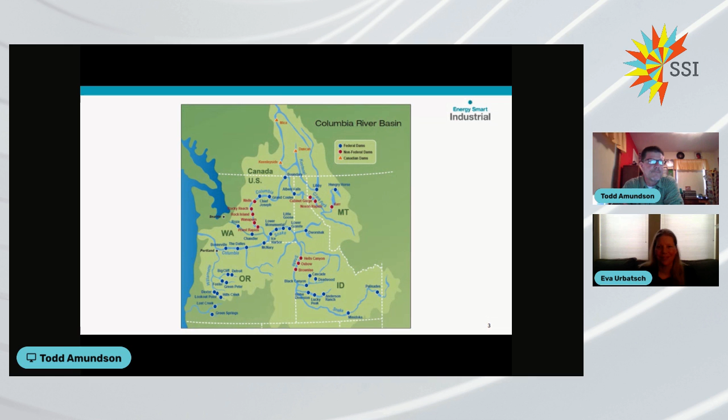Energy Smart Industrial program launched in 2009 with Cascade Energy as the implementer to address a need to meet BPA's portion of the Pacific Northwest Power Plan's targeted industrial sector energy efficiency savings. Of the over 120 BPA utility customers, 115 are enrolled in the ESI program, which represents 99% of that industrial load. Those not enrolled have very little to no industrial customers with limited EE budget dedicated to residential customers.

During its past performance, combined with expected industrial energy efficiency achievements this rate period, the ESI program has helped BPA acquire energy savings of over 10% of that overall present industrial load mentioned earlier.

ESI program design and implementation has remained fairly steady and consistent since 2009. Certainly some continuous improvement efforts throughout, some from utility feedback, others from evaluation studies, but we'll dive into those details here. A long-term program such as ESI means that highly credible boots on the ground, the program partners, engineers shown here, can come back to the utility's industrial customer site several times over the years, collaborating with new and/or senior staff, involving new energy efficiency projects and revisiting old ones too.

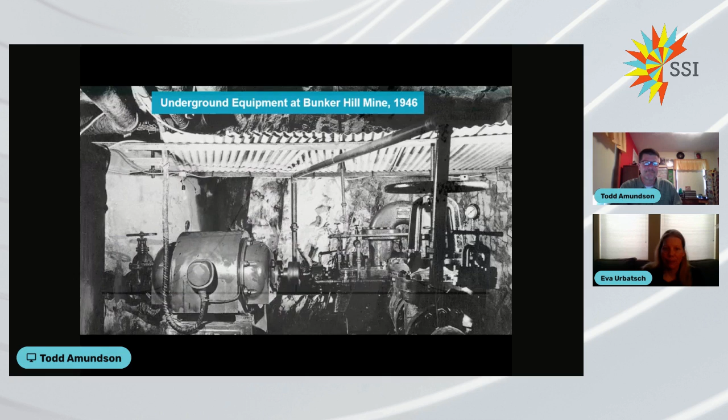I know for programmatic reasons, a lot of times we treat these as completely separate domains, but really a lot of the lessons apply to both kinds of projects. Next slide, please.

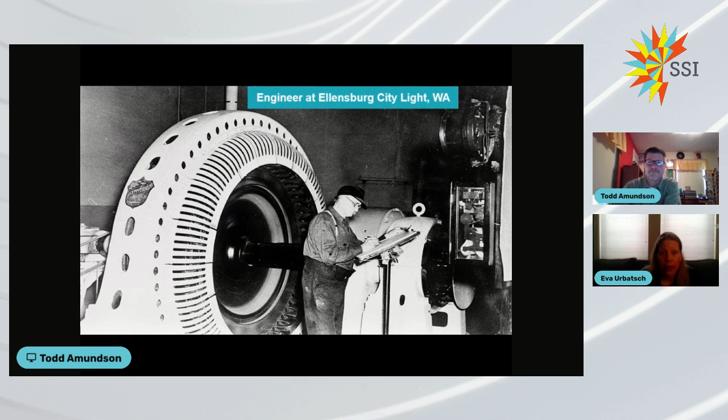So to make this system work better, where would you start? I know the engineers in the audience are probably looking at those machines and the belts and thinking about how they could reorganize them. But really, one of the easiest ways to make projects last longer is to focus on that gentleman in the middle, the people. It's not that design and technology aren't important factors. Obviously, they've gotten us a long way. But once you've done that, you really have to think about the people who interact with the projects.

Next slide. So the people are really crucial to how projects are going to work. You need buy-in, both from management and operators. But the other problem with people is there's turnover. They get promoted, they quit, they move on.

And they've also got lots of things on their mind. We work in energy efficiency day in and day out, but operators have their primary job, and then maybe they're thinking about their lunch or their kids, and maybe energy efficiency isn't top of mind.

So what does motivate them? Sometimes it's as simple as just reminding people of the system that they have, how to use it, where the set points are. Sometimes it's about reminding them of the good work that energy efficiency can do. And sometimes it's money. All of these things we can use in simple reminders to keep projects performing well.

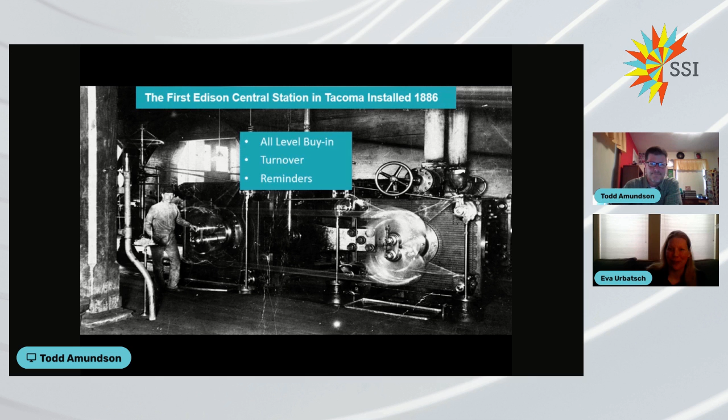Once again, it doesn't take a lot of money. It just takes a little bit of thinking outside of our usual box. So we're going to share a few stories illustrating these points. If you want more, there's more in the paper. I encourage you to go read it. All right, Todd's going to start with this story. Thanks, Todd. Thank you, Eva.

Here's a custom project of a compressed air system control strategy type that fell into the challenge bucket while ricocheting off the rim of the failure bucket. The site's a pulp and paper mill with 20 air compressors that total 3,000 horsepower and are spread throughout the multiple process areas, supplying air through a network of piping and distribution system components.

Over the years, capital equipment upgrades had been implemented, but early in the ESI program existence, with energy efficiency study in hand, an assigned site project engineer had interest and management approval to implement an overall control system. The control system would replace the efforts of an employee who would walk the plant site twice daily, manually turning each inlet modulated compressor on or off to meet demand load needs. This would be upgraded by making all the compressors run load-unload with a control system that would stage the compressors to meet demand load needs.

The program engineers worked with the utility and site to complete the energy efficiency custom project. Fast forward 7 years, or in between, the program engineers had worked a number of times with the utility and site to help complete many process improvement projects, including more than one mega project.

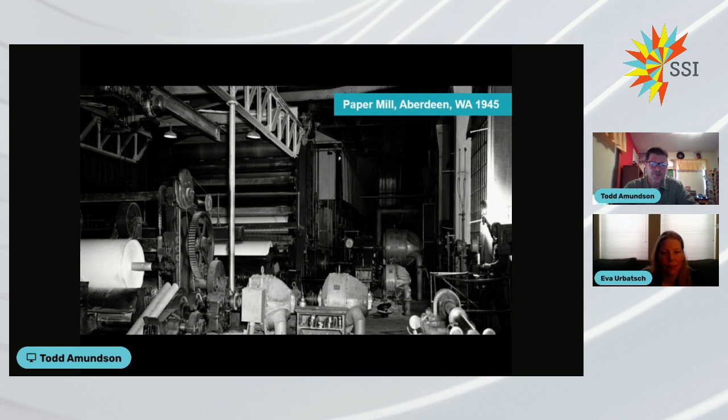But a refocus on the complete compressed air system found that many of the compressors had migrated back to manual control. A number of challenges were identified. Upon inquiry, it was determined reverting to manual controls happened when a compressor failed to meet demand, whether perceived or real.

Operator myopia was another issue, where operators would adjust the air compressors working in their area to get more pressure, which in turn stole air from the rest of the system without fixing the actual issue. And the operators were suspicious of the control equipment.

They felt the system was too cheap to function adequately in an industrial environment, that the project was, in their words, commercial grade. Well, along with the successful implementation of other process improvement projects, the program engineer was able to work with site personnel to regain most of the benefits from the original control system design.

In this case, the mill had good personnel resources and a robust data historian. Spending slightly more at the outset of the control system project could have helped mitigate the challenges or issues and possibly ensure that operators were more open to letting the system do the controlling.

A more robust control system strategy with a centralized human-machine interface would have been maintainable and a valuable asset to building trust.

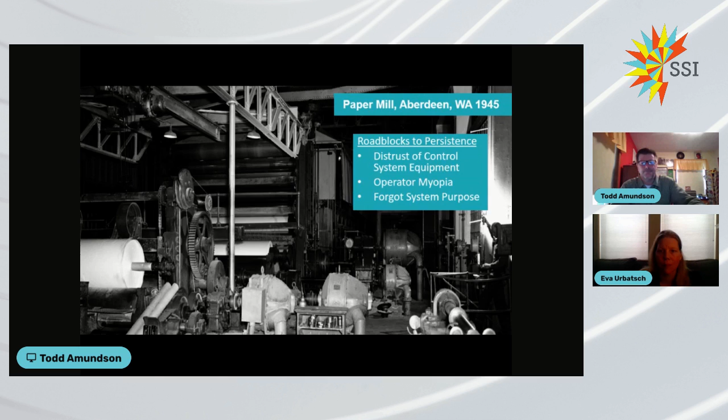And here's success story number one.

Too many capital projects rely on institutional knowledge, that is, knowledge not well documented, if at all. This can be general knowledge about the new equipment, project design intention, that is, a control strategy of air compressors to meet system needs and save energy too, or specific historical knowledge of why a project was initially implemented.

Simple reminders after the completion of the project and delivery of the energy efficiency project incentive check include very low-cost ways to enhance project performance.

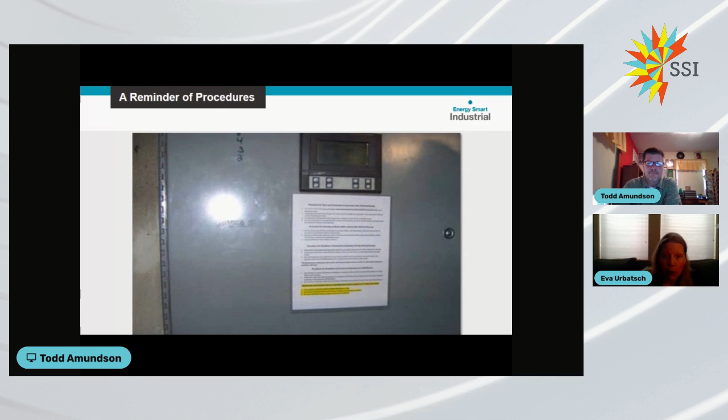So what you see there is a simple write-up that has the day-to-day procedures on it that's been printed out, laminated, and attached to the compressor.

The other thing that happens there is the issue resolution procedure. We find a lot of times that control systems in particular get out of whack because there's some sort of upset or emergency, and it's all hands on deck to get the process restarted. Things get moved into manual, but maybe they don't go back to their efficient operation that's been carefully designed.

A reminder like this can really help the boots on the ground, the people there, remember what they're doing and how to come back from any sort of problem.

This site graduated from SEM, and I'm happy to report that an engineer went back there, and the sequencing system is still in operation today.

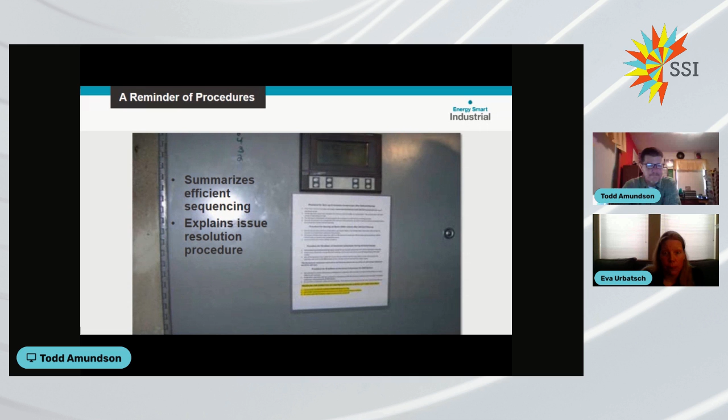All right, next slide. And sometimes the bottom line is just the bottom line. Money is really what can motivate a site. This site is a compressed air system upgrade at a lumber mill in Northwest Oregon.

The site was using their energy efficient control system, but then with layoffs and some turnover, the energy efficiency got deprioritized.

This emphasis on the bottom line really helped the site focus. It got faster response to maintenance requests and also more attention for energy efficiency projects.

So sometimes we want to go and make the fanciest thing imaginable, but a simple chart is all we really need. Okay, Todd, bring us home.

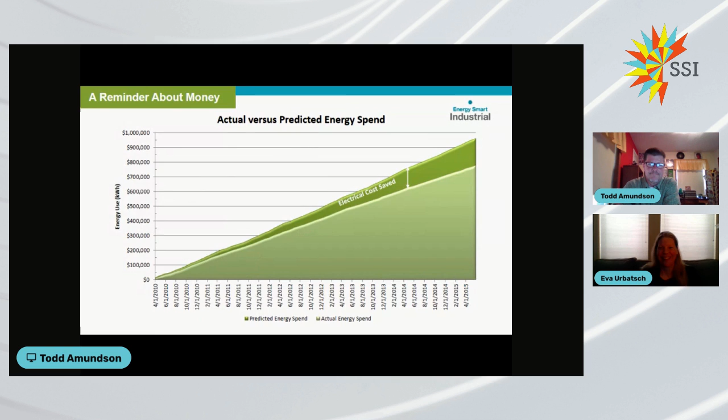In conclusion, a long-term energy efficiency program with continuous personnel, such as the ESI, can contribute to the long-term success of implemented projects. With changes of ownership and/or site personnel changes, project knowledge does not get entirely lost. This can apply to custom or capital projects, as well as those leaning more on operations and maintenance improvements or strategic energy management projects.

While surely there's more ESI program learning to be had, this presentation identified several situations that led to loss of energy savings for custom projects, while also sharing lessons learned that program implementers and sites can apply to ensure persistence of energy savings. These include program continuity, creating or updating standard operating procedures, and creating and displaying signs with clear and simple reminders for current and future operators.

When continuous monitoring by sub-metering or an energy management information system isn't practical or an option, use an existing control system to provide operators with system-level visibility. Also important: ongoing tracking of key performance indicators or cumulative sum of energy savings, and using measured and verified energy savings information, translating that to cumulative money savings reports for site staff to communicate with other employees and management. And celebrating success, such as creating and displaying project success posters.

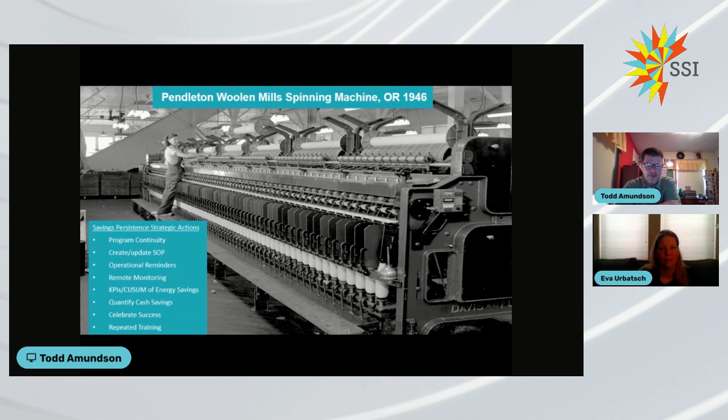In the field of energy efficiency, as in life, there are things that can and things that cannot be controlled. While optimism about energy efficiency project success is helpful, considering ways that projects can fail with early thinking about preventative strategies can reap great benefits in the pursuit of perpetual project performance persistence. Thank you.

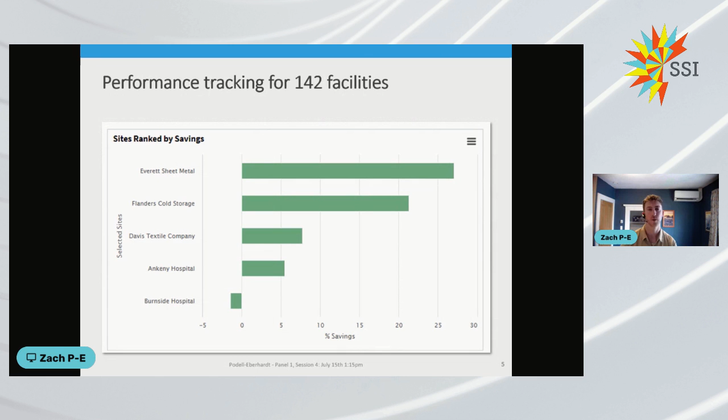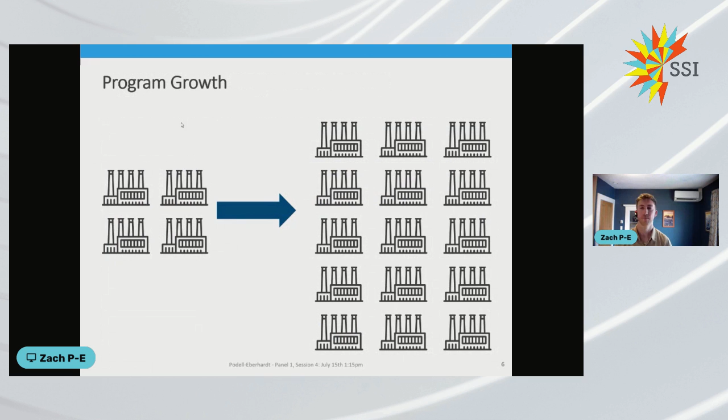So energy management programs are growing. In the DSM world, strategic energy management is growing. And as these programs evolve towards an emphasis on continuous engagements, programs will transition from managing dozens of SEM customers to hundreds. Our observations from working with SEM participants around the country suggest that the traditional labor-intensive methods of delivering SEM, like Excel workbooks and decentralized energy data collection, can't scale reliably and cost-effectively at those levels of participation.

There's simply too much data. And key mid-sized industrial clients just don't have the time or expertise to implement a better solution themselves. In some ways, Sysco facilities are actually a decent proxy for mid-sized industrial sites. They use about 4 to 10 million kilowatt hours per year, and they have a heavy industrial refrigeration load similar to the process loads you might see in a food manufacturing facility.

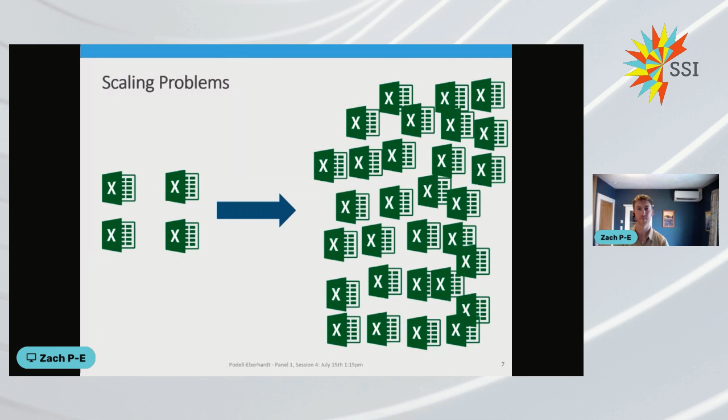So what's at risk for Sysco and others? First of all, savings are at risk. Without energy accountability, without putting credible performance tracking into the hands of their people, Sysco's program would likely have been less effective at saving energy.

Persistence is certainly at risk. For Sysco, if performance reporting shows backsliding for 2 consecutive months, that facility gets put on a watch list and gets extra support to recover. Additionally, a lack of performance tracking puts the entire program's credibility at risk. If an SEM or pay-for-performance program can't get timely data to report on performance, it erodes the overall credibility of the program, because if you don't believe in the reporting, you just start ignoring it.

We do recognize that a case study on a program across a single corporation is not necessarily a one-for-one comparison to a DSM-sponsored program. But despite the differences, a corporate-driven program and a DSM program with various participating facilities all share the simple characteristic of a group of facilities who have set out to achieve an energy savings goal, mostly on their own, with support from coaches and peers.

So how does Sysco actually save energy? They do so through a combination of retro-commissioning, training and behavioral change, mechanical and lighting retrofits, and efficient new building design and construction.

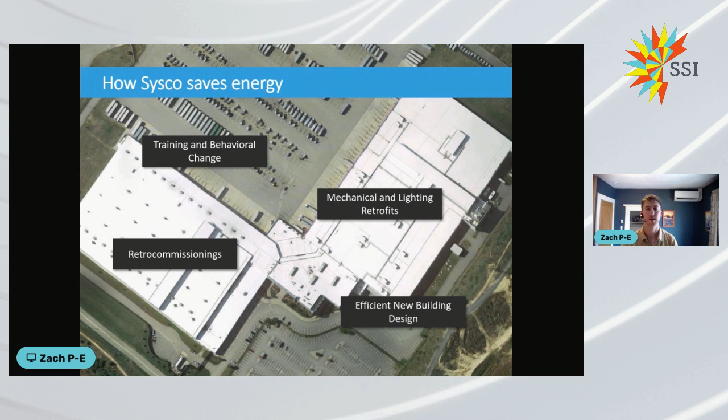But this presentation is really focusing on energy performance tracking. So how does Sysco track energy performance? They retrieve near real-time 15-minute interval electric data through data acquisition hardware installed at their facilities. I'll point out that Sysco really has not invested in sub-metering. This monitoring is being done at the utility meter level because the purpose of Sysco's metering is to generate accountability, not diagnostic capability. Sub-metering is a lot more expensive to maintain and install, and Sysco just hasn't seen the value of that sub-metering. You don't need sub-metering to create accountability for energy, is a lesson that Sysco has learned.

Sysco also pulls in weather data and inbound and outbound case movements on a daily basis, which we call production.

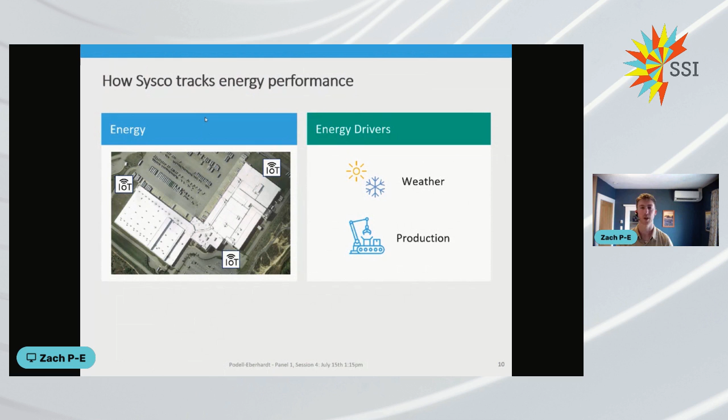And they follow a top-down measurement and verification methodology that meets IPMVP Option C and ASHRAE 14 guidelines and aligns closely with best practices found in DSM programs. And all this happens in a centralized system for the 142 facilities in the program.

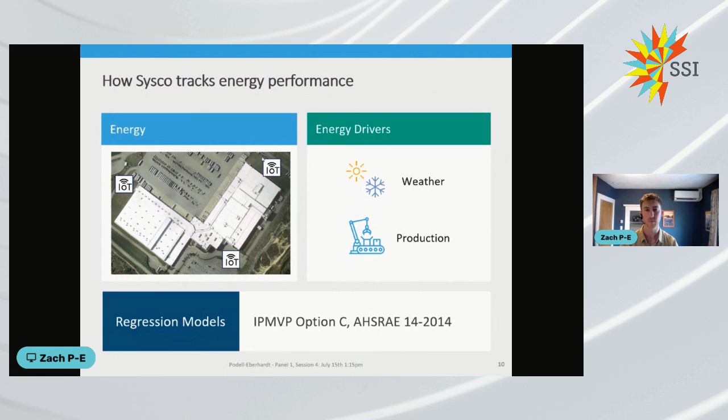So as we analyzed Sysco's success story, one theme appeared. Sysco uses energy tracking to create an accountability structure for energy performance, which we've called energy accountability. Sysco holds people at the corporate, regional, and facility levels accountable for achieving efficiency goals, all the way up to senior vice presidents and down to refrigeration system operators.

And over the years, through testing and iteration, our team has found that 5 characteristics have emerged as requirements to create lasting and effective energy accountability at Sysco. These characteristics are analyzed in more depth in our paper.

The first is consistency. Tracking and reporting can't be a flavor of the month. For example, Sysco's performance reporting has maintained the same metrics since 2015.

Clarity is the next characteristic. It's important to define success plainly and don't move the goalposts. Sysco's reporting focuses on dollars and percentages, not kilowatt hours.

Fairness is important. Fair performance tracking is an excuse eliminator. Unfair performance tracking just breeds excuses. So for example, if you compare a facility with LEDs and an efficient ammonia refrigeration system to a facility with T8s and packaged rooftop refrigeration units, the older facility is never going to look as good as the newer.

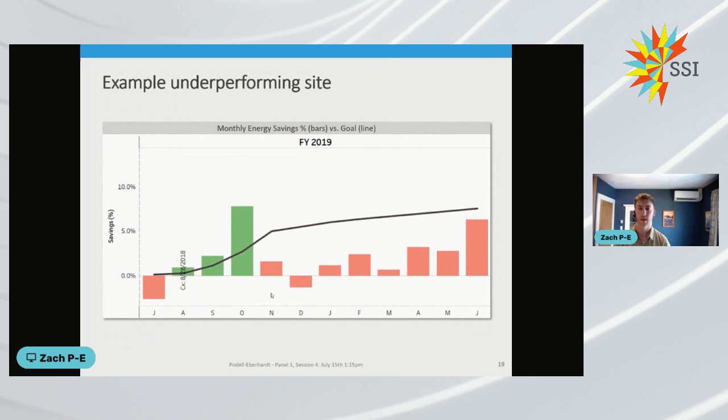Then something happened in November and the savings dropped. Very quickly, the program knew something was wrong, and by December the site was clearly backsliding and received extra support to get back on track.

More granular and recent data is always accessible and is pushed to key individuals, like this report that gets sent weekly to site facility managers. They appreciate this heat map report.

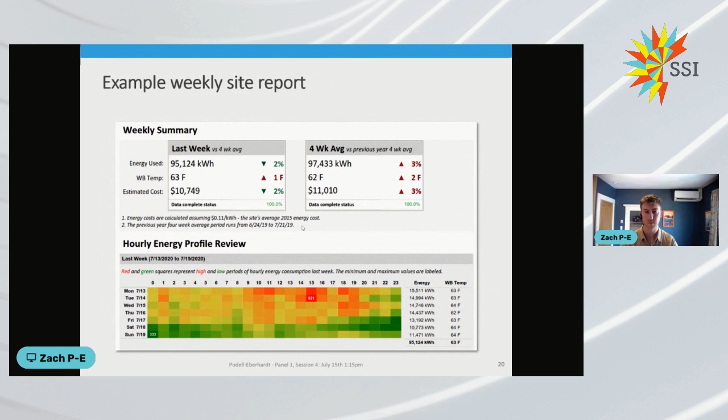I want to circle back to the applicability of this case study to DSM programs and talk about some of the limitations involved and how to overcome them.

If you're thinking this is a great case study to share with DSM participants, so they're motivated to set up performance tracking and cut their energy use in half like Sysco did, please do so. But in our experience, most DSM participants don't have the internal systems, knowledge, or commitment to self-generate the consistent, clear, fair, timely, and trusted energy performance tracking that's necessary. Sysco hired a third party to deliver this reporting for those exact reasons.

One limitation is that data acquisition and baseline modeling poses huge challenges in DSM and corporate energy programs. Managing all the inputs and outputs is difficult. Even if smart meters might be installed, the data might not be easily accessible. And complex industrial facilities can be extremely difficult to model.

There are some systematic limitations. More and more utilities might have smart meter data to provide high quality 15-minute interval energy data, but there are still structural limitations for third-party contractors to acquire this data. A 2020 ACEEE survey of 52 utilities found that most were underutilizing that AMI data in their energy efficiency programs.

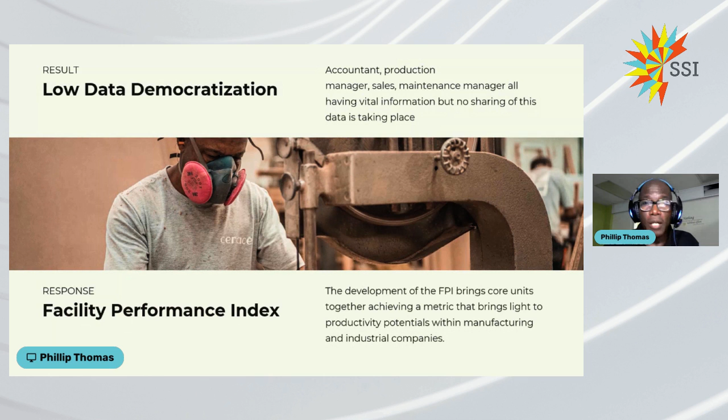And here is why the FPI was born, because the FPI is a Facility Performance Index. You're going to see it, you're going to see what it's about, you're going to see how it looks. It brings the core units together, achieving a metric that brings light to productivity potentials within the respective companies and firms. It brings a whole new aspect to what was being said before: day-to-day accountability of what is happening and what needs to be done. It also gives persons, not necessarily even in the manufacturing sphere, an opportunity to get a quick and easy understanding of the potentials, and then apply that. And furthermore, being able to do internal benchmarking with external benchmarking, and the list goes on, which you will see as we go along.

Okay, so let me quickly get something done here. So you have the data, the responsibility, the expenditure. You have the data, but it's in different silos. The responsibility, each person is doing their respective area. And the expenditure has just been a matter of money being put together for various initiatives, and at the end of the day, it's not being maximized because the disparate information isn't being brought together. And so, lost opportunities result.

Now I'm going to show you the next slide, and many of you are going to smile because this simple equation is something everybody knows from primary school days, or grade school, K-12. In Jamaica we call it primary school, but high school too. The y equals mx plus c. Not a Fourier series algorithm or anything complex. But I want to break this down because ISO 50001 says the following.

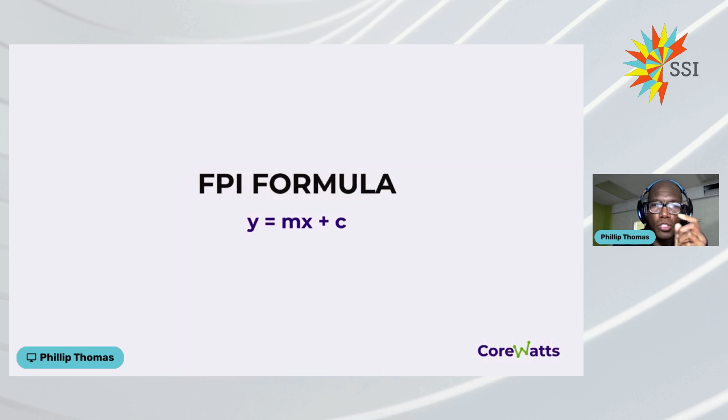In energy consumption, you need the following: y is the energy output, fair enough. The efficiency metric is our m. The variable could be production. I think it was either Todd or Eva or Zach who mentioned weather data also being included, primarily for production, because thankfully where we are, weather isn't a wide variance, but that would also be inclusive. But here's the kicker to it all: when you use an energy per cubic foot or any other metric like that, what it's basically saying is the plus C, the base load, is taken out of the equation. It's zero.

And if you start wrong, where do you usually end up? There you go. And so what ISO 50001 was so instrumental in doing is getting an accurate energy performance indicator, or EnPI, for the matter of how energy is to be monitored and reported.

Just a quick example. Say you have a large firm with a large piece of equipment, and a smaller subsidiary elsewhere. The smaller subsidiary hears from the large firm, hey, get this piece of equipment because we've had phenomenal results. When you put that equipment in the small firm, they say, you just killed us. Why? Because the base load in that large facility is offset by the larger production quantities. When it's put in the smaller facility, once they turn it on, they just don't have the production volume, call it break-even analysis, to make up for that base load. So the whole dynamics of the equipment, while beneficial at the large top tier, is catastrophe for the bottom.

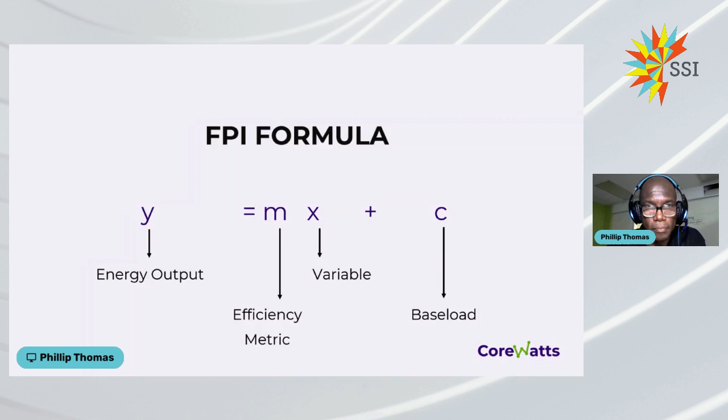So having established that metric, what we saw was the following. Can we take that and populate it daily? And being able to populate it daily, what would we find? It was magnificent, because what it demonstrated, and you'll soon see the graph, was the base load coming out and a true efficiency metric coming out.

You remember the M and the plus C? So having seen the base load by itself, because remember, base load represents the energy consumed when the plant is not producing, we began to say, hold on a minute here. Are you saying this is what's happening? Listen to the train of thought. Now you're getting the accurate dynamics of the plant. Simple, anybody can understand the plus C once they recognize what base load is. So the person began to ask, so why is that?

So we went into the production line, and guess what we found? One piece of equipment, called a post grind, was 25% of the entire consumption of the plant. Can you imagine that? They were going into LEDs and all these other things beforehand, not recognizing that one piece of equipment, which was not LED lighting, was accountable for 25%. Can you imagine that?

So the plant manager said, Phillip, before that we were investing in so many of these areas. But let me not go off on a rabbit trail.

So with the base load, they recognized that they would produce, pause, the equipment continues to run, and then another batch comes in. And the first thing we said was, hold on, let's get more of these batches and take down the interval, since it's a batch process. That meant some adjustment with the ingress of raw materials, but that was nothing. The other thing was to see whether the type of operation actually matched what the equipment was made for.

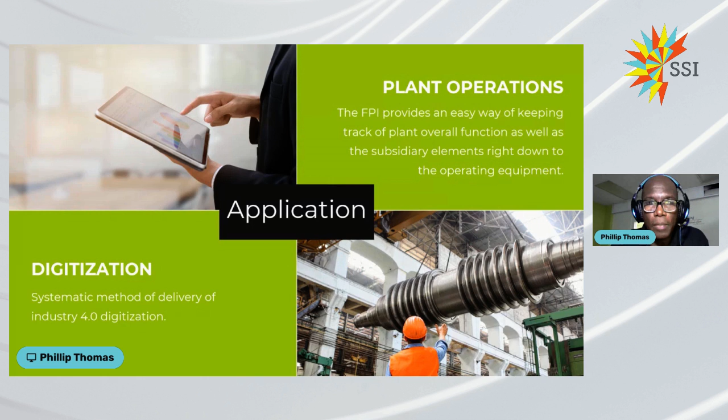So I talked about this future application. We have pump curves. I see, and my time is almost up, but with this we can also start doing a similar FPI curve per equipment for the respective manufacturers, so persons are able to understand even clearer how they're able to apply what they produce with their respective products.

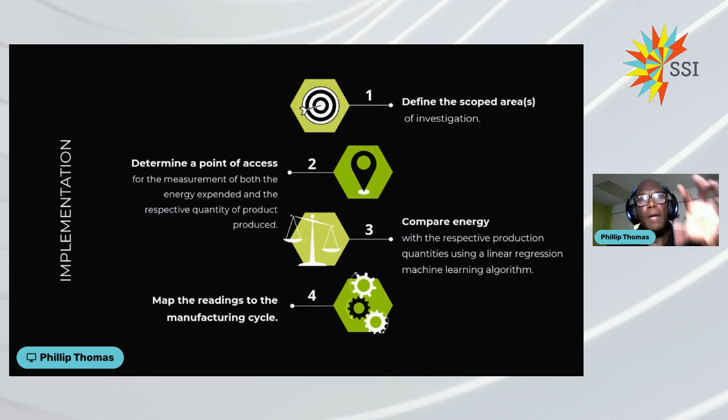So you're bringing the energy and the respective quantity. And what happens now is that, and again, as I demonstrated this with the linear regression, being able to combine the two and then map the readings to the manufacturing cycle. And how does it look?

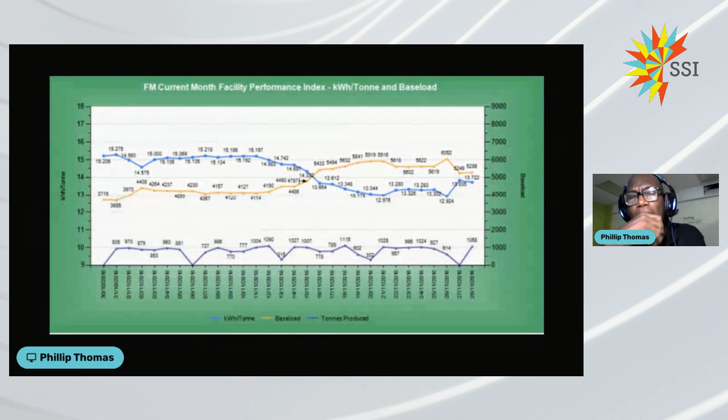This can't be, something is wrong. And I went to the maintenance person and I said, well Phillip, we have done our checks and we don't see anything happening, what are you talking about? But I said, no, yes, I hear you, the amperages are all right, everything is okay. But why would the efficiency just continue climbing for no apparent reason? In that case, it was a matter of degrading, not increasing. I'm confusing some persons - the whole aspect of it was using more energy, so it was actually a decline in performance. If you get the point I'm making, do you know what happened in the end? Air compressor went out.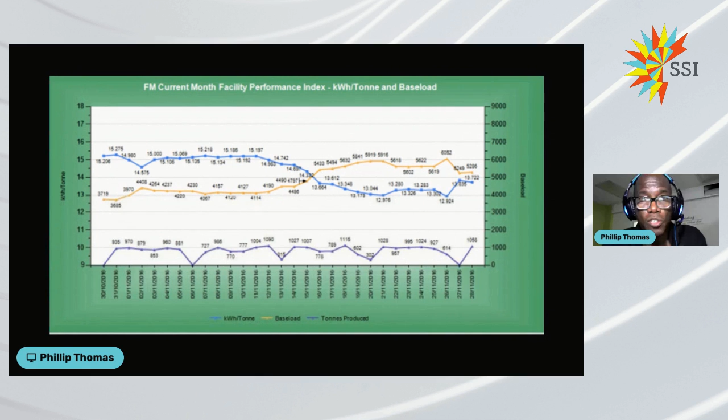Now, this was when we were just getting into the whole of this, so persons were kind of looking at me skeptically when I told them something was going wrong. They're like saying, oh well, what's he talking about, he's just making all this stuff up. Air compressor for the entire plant.

So in concluding: minimize waste, enhance public decision making, save energy, minimize greenhouse gas emissions. I heard a presentation by Joy Pixley. She was mentioning how small and medium manufacturers are being bombarded with all these technologies - how do we go about it, what do we apply? She was saying there is so much going on, nobody really knows how to handle all of what is coming. And yet still everybody recognizes that there's something out there which says all of what is being said needs to happen. We just can't find what it is that's going to help guide us appropriately from one step to the next.

I put it to you that the FPI will help greatly. And the matter of this, having borne out the ISO 50001, we are guaranteed of its accuracy, if not, that's not the best word I could use, but it's being verifiable and applicable to respective industries.